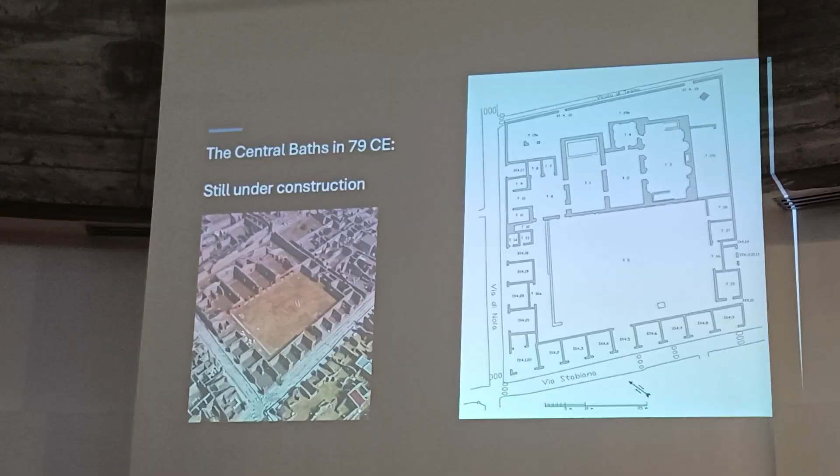When Mount Vesuvius erupted in 79 CE, the central baths in Pompeii were still under construction. This is an interesting feature already, but the building's incomplete state may provide us also with a prism, a tool, to look at the exact moment of the eruption and the hours that followed.

Our aim today is to bring in a new perspective on the debate on the date of the 79 CE eruption, focusing on the building activities that were going on in the baths at the time of this huge natural disaster. We propose here today a timeline of the Central Baths building projects in relation to seasonal work in the world of Roman construction.

We seek to combine archaeological evidence from the baths with snippets of information from other source material, written sources that reveal ancient know-how and building practices. Admittedly, these snippets are few and somewhat dispersed across time and region.

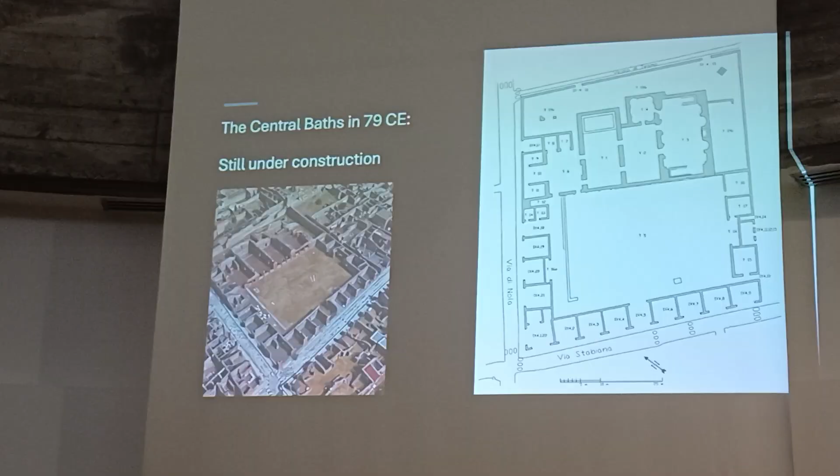Still, the idea to have a closer look at building activities going on in Pompeii in 79 and to relate these activities to the moment of the eruption is new and worth a try. In any case, it is an approach that has remained untested so far, and we look forward to discussing our ideas with you afterwards. The line of argumentation unfolds in 5 parts.

First, we will briefly present and discuss the status of the building project in 79 CE and outline some of the main principles and hypotheses, all based on the analysis of the baths published in our recent monograph. Second, we will discuss the sequence of the building activities and establish what remained to be done when Mount Vesuvius erupted and put an end to all activities in Pompeii, including the building of the central baths.

Third, we will discuss some written sources that shed light on building practices and that seem to reflect Roman ideas about seasonal building activities. Fourth, we will identify some possible clues and detail how this archaeological evidence from the central baths might help to narrow down a bit the period in which the eruption took place, a time span now ranging from August to well into November.

Fifth and finally, we propose a timeline for the building of the central baths and connect this timeline to possible dates for the eruption, concluding with a suggestion for the period that seems to us the most plausible one.

First, however, and as a conclusion of this brief introduction, it is important to underline the fact that the second half of the 1st century CE was crucial for the further development of Roman baths and bathing culture. A real boom in bath building started in the late Neronian Flavian period, not only around the Bay of Naples, but in the Roman world at large.

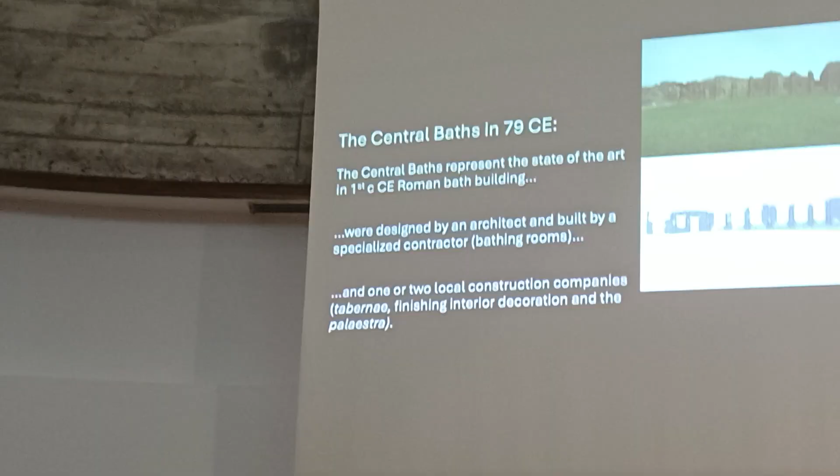In any case, the skills and experience that were needed to design and build these state-of-the-art bathing rooms, notably the heated rooms, allow for the assumption that a construction company specializing in the building of baths was hired to perform this part of the project. Other work in and around Insula 4, such as the building and finishing of the tabernae, the portico surrounding the palaestra, and the interior decoration of the rooms, could be carried out by one or two local building companies.

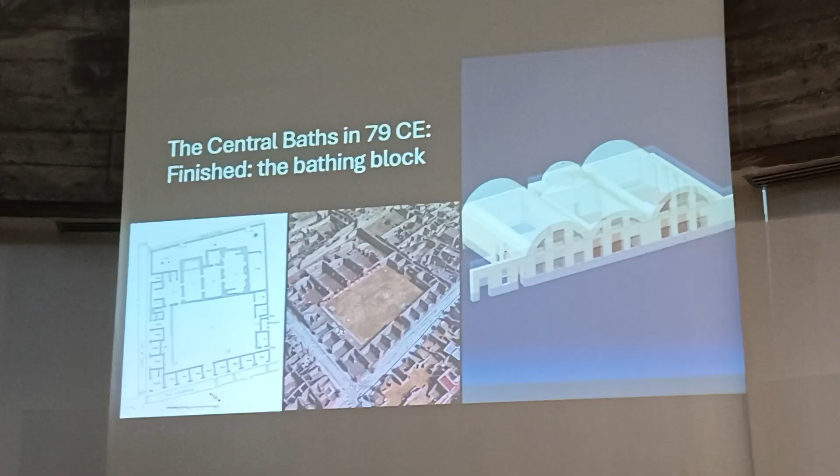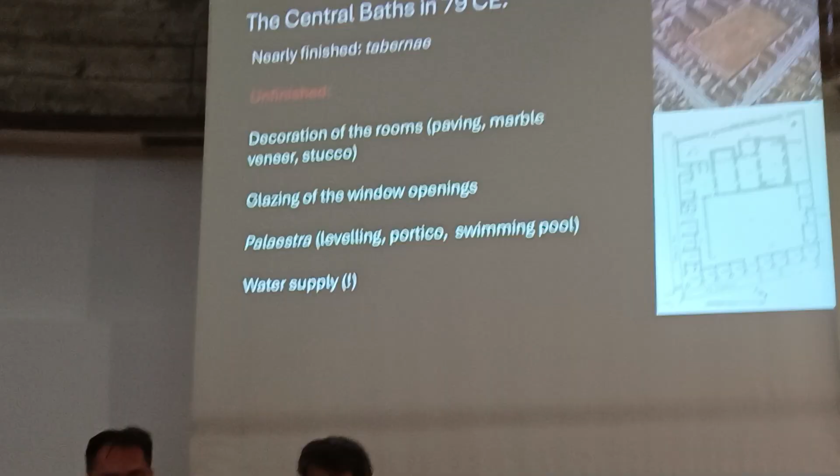All evidence from the building points to rational and deliberate planning of construction activities and a well-considered sequence of work that should prevent delays. Roman builders were well aware of the constraints and possibilities that various building materials represented. Reading Vitruvius' ideas on the different qualities of stone, sand, and wood in Book 2, for example, clearly shows the importance of picking the right materials for different kinds of building projects.

We may assume that experienced builders hired for expensive prestige projects, such as the central baths, possess this kind of know-how. Moreover, passages in Vitruvius' work and recommendations by other writers, such as Faventinus and Palladius, reveal a high degree of rational planning. With a closer look at the central baths, it is possible to detect such rational and careful planning of the work in the building. Evidence points at a series of well-considered steps that allowed for an efficient and hence cost-reducing sequence of work during the phases of construction and finishing the building.

The sequence. At the time of the eruption, the rough construction of the bathing was completed. All standing walls of the apodyterium area, the frigidarium,

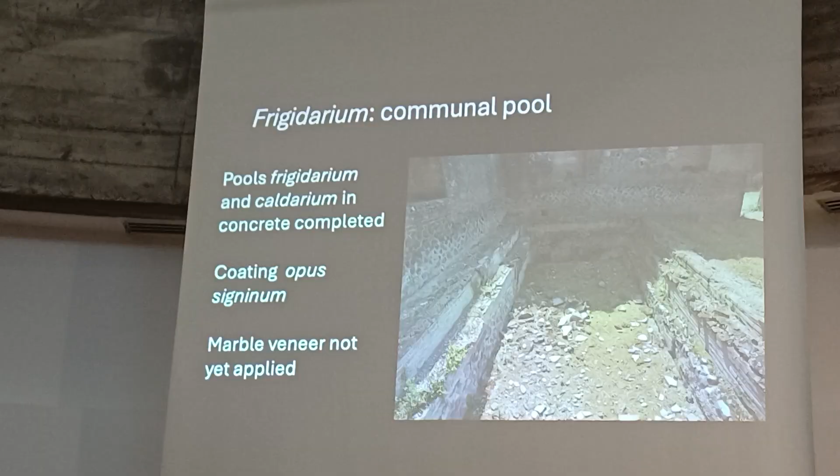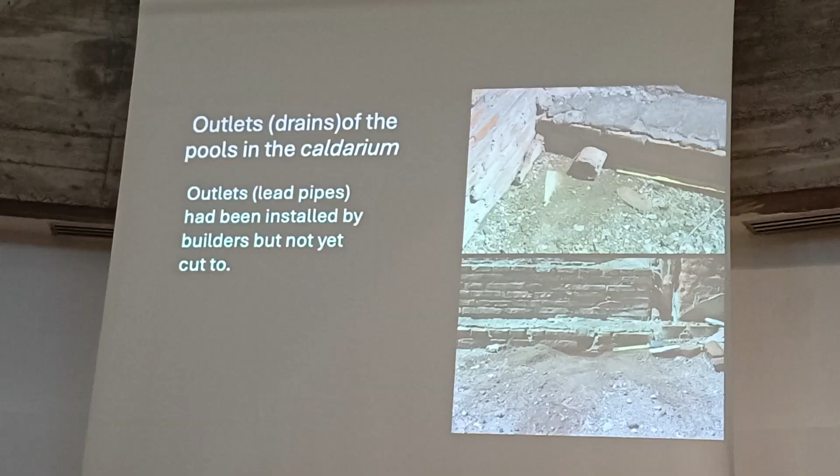The two pools of the caldarium and the one of the frigidarium, all three in masonry and lined with opus signinum, were also completed. The drains of the pools were also placed to facilitate the work of plumbers who had to arrange the water supply to and within the bathing rooms.

The discharge of the wastewater was partially finished on the east side of the tepidarium in the service area by a channel that would direct the wastewater to the back street, the Vicolo di Tesmo. The water that eventually would have drained into the sewage system of the public latrine was under construction in the palaestra to the west of the bathing rooms.

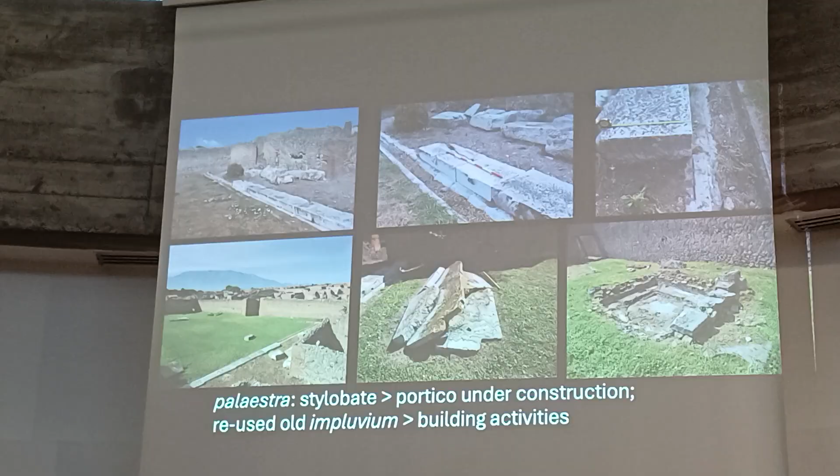The summary of the evidence so far makes clear that the work carried out by the specialized workforce, the bath builders, had mostly been done. The following activities remain to be done. First of all, interior decoration of the room, probably with marble veneer for the floors, pools, and lower parts of the walls. The slabs of colored marble found in the palaestra point to this type of decor and are another key for the intended grandeur and sense of luxury of the baths, if they had been completed.

The shiny marble of floors and lower parts of the walls could have gained even more prominence in the sunlit rooms thanks to large glazed window openings. The glazing of the windows was scheduled in all probability for the very last stage of the project, given the fragility and the cost of window glass, novelties that had been invented only shortly before.

Most of the work that had remained to be done was in and around the palaestra. Building a portico planned for 3 sides had just begun. Several still unpolished travertine blocks had been put in place, serving as a plinth for the columns. The last of these blocks still shows the bosses that still had to be removed. The gutter that had to run alongside the plinth was somewhat further executed, rounding the northwestern corner of the palaestra.

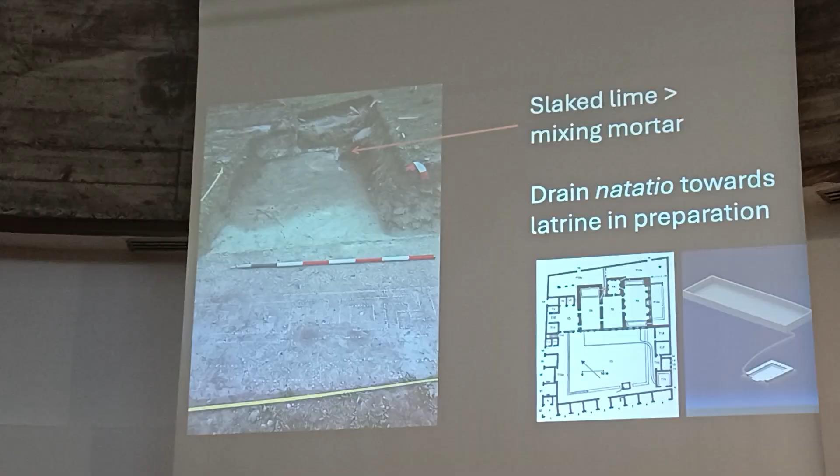The channel for the discharge of water in the southern part of the palaestra was in its initial stage. We were able to retrace the foundation layer here in one of the trenches. The same trench reveals the function of the basin at the west side of the palaestra, a reused impluvium from a former atrium house, probably out of the 2nd century before Christ. This impluvium served as provisional water supply for the building activities that were still going on, notably in the palaestra itself.

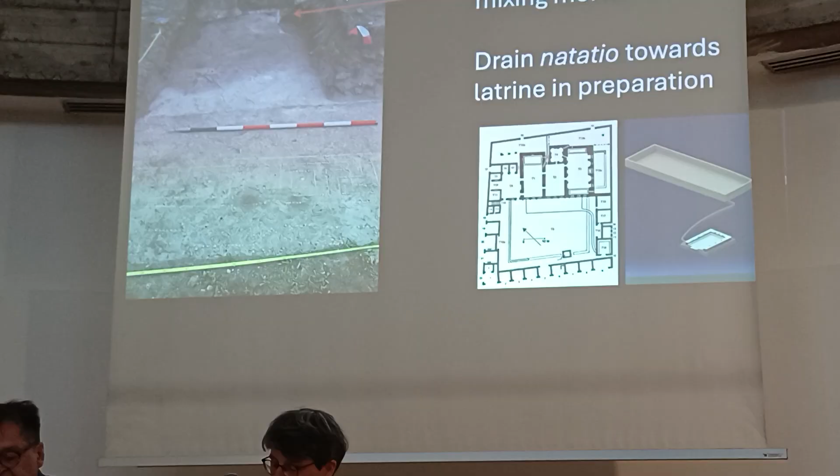In the final stage of the building project, shortly before the delivery and opening of the bath, the basin would have been demolished and the southwest area of the palaestra would have been leveled, that is, after the completion of the discharge channel towards the latrine. The final leveling was relatively easy. After all, the construction of the outdoor swimming pool, Natatio, at the east side had just begun. The cavity was excavated and the first layer of lava cementitium was put in place.

Both Fiorelli and Mau mention the heap of sand next to the cavity, sand that was not removed away from the building site, but was meant to level the southwestern part, an area sloping down quite steeply because of the natural slope here. Trenches reveal the outer corners of the Natatio and furthermore showed the foundation layer. The walls in cementitium had not been built yet. The underground channel in concrete that eventually would have led the overflow water from the Natatio to the latrine had to be finished as well.

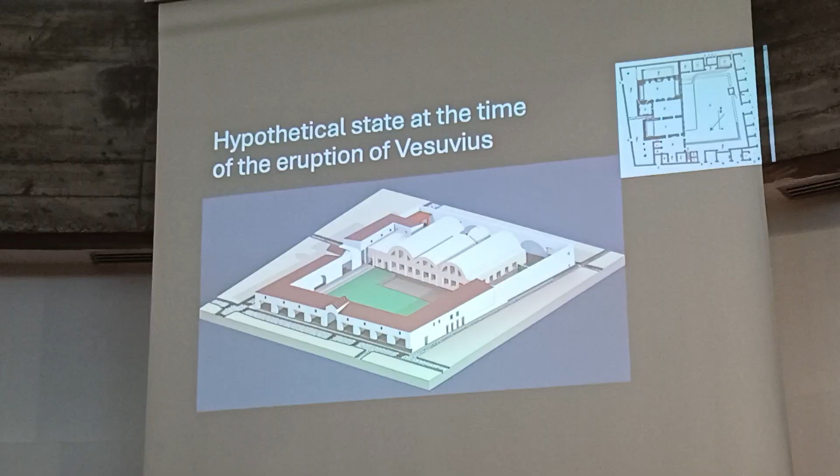In conclusion of this part of the analysis, the works that remain to be done could also be executed by local workmen, not specialized in the building of baths or the technical installations for heating that were part and parcel of building bathing establishments. Finally, most of the remaining work seems to have been less dependent on the time of the year and specific weather conditions such as frost and excessive rainfall. The exception to this, however, was the water supply.